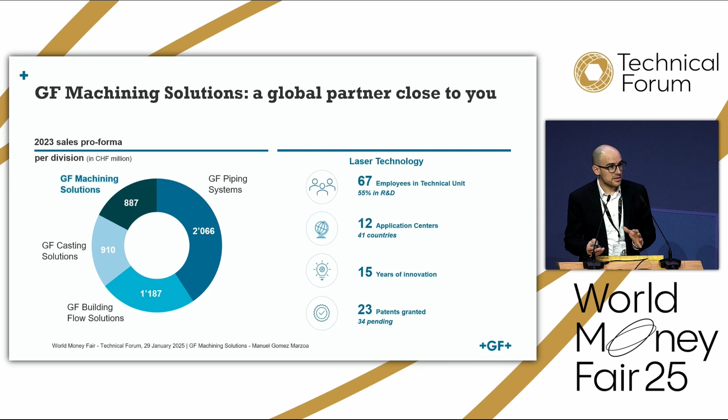So you've seen a little bit in the teaser, GF Machining Solutions. We are a Swiss machine manufacturer. We provide high-speed milling machines, EDM machines, and laser. As for the laser, we are in charge of engineering the machines, but also the CAM system. This gives us really the freedom to innovate at our pace, and as well strike a good balance in keeping things simple and user-friendly.

We are leading providers of 5-axis machining centers for laser in different industries, but essentially there are just two types of applications we do. First is laser texturing, where we apply normally aesthetic textures on any 3D part. It can be a part that is several meters long, or a small part for the watch industry, for instance. And what we are really seeing, thanks to the advent of femtosecond laser machining, is a lot of interest in laser micromachining, which you can assimilate to laser milling. We remove material, sometimes in applications requiring really high precision within microns. And of course, we also have, as the last picture shows, laser cutting and laser drilling applications.

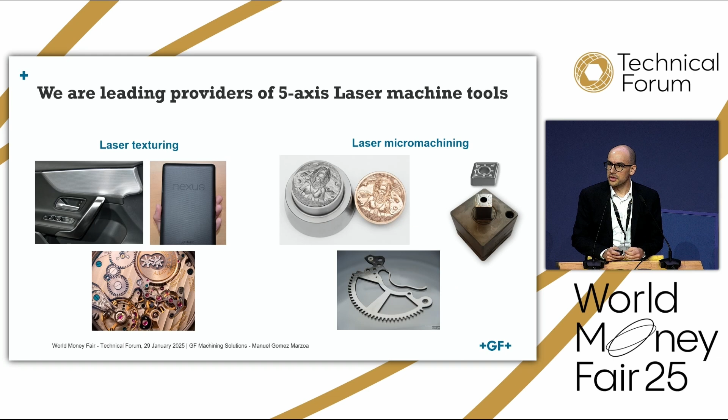Now, in the mint and medal industry, one just needs to come here to Berlin every January and see that just walking around the stands, we see crazier and crazier things. We see unconventional machining or manufacturing methods everywhere with 3D printed coins, composite coins, plastic injection. We see unique designs in 3D. I mean, it's just fantastic. This shows that innovation is really driving this world. And also for the laser, it's happening.

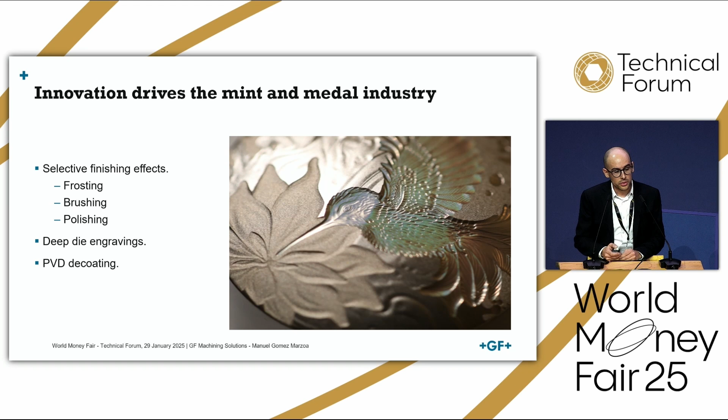Regarding laser, we've seen lately the following trends coming up. Customers are getting more interested in customizing, really fine-tuning the finishing effects, the traditional ones, but also new ones like brushing or polishing. Then we have also requests to do deeper designs, deep die engravings. The medals are getting bigger, they are having higher relief, so this is becoming commonplace. Now we are doing projects up to 10 millimeters in depth, with finishing applied to it. And, of course, requests for PVD decoating, which all shows how flexible the laser is as a tool for a mint and medal shop.

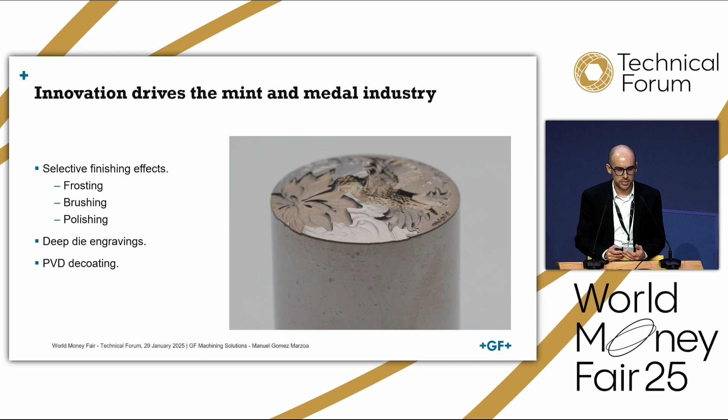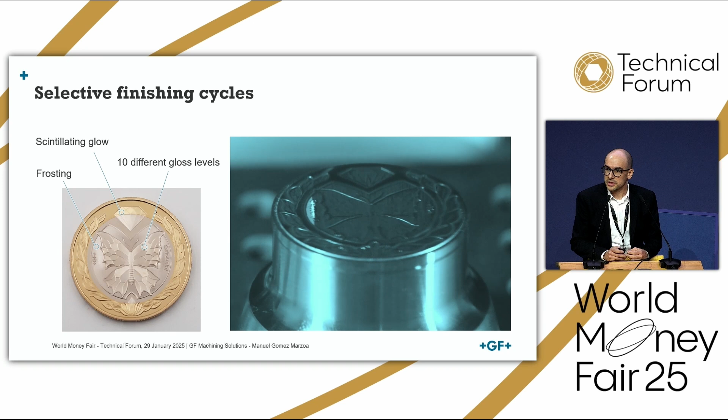So let's review a little bit each of these three points, starting with the finishing. This is an example we've done a while ago, where we have a lot of different finishing cycles. We have a frosting. We have 10 different gloss levels on the wings of the butterfly, and we have a scintillating glow on the diamond. All this is possible by mastering the laser parameters, and our systems allow us to do that easily.

Moving to high relief die laser engraving with laser, this is a nice example as well. It's 3 millimeters deep. It's the shape of this hummingbird. And we also perform some frosting and glossy finishes at the end. The most interesting part here is that we have done it on a dome that has a height of 3 millimeters.

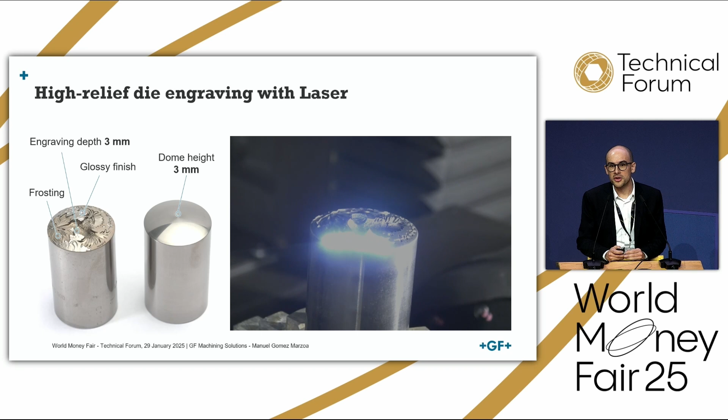We use a quite funky machining strategy that follows the shape of the dome progressively to make an engraving that looks really fantastic and is right to size everywhere on the circumference of the die. Here in the video you can see a finishing cycle where we are completely following the shape of the engraving.

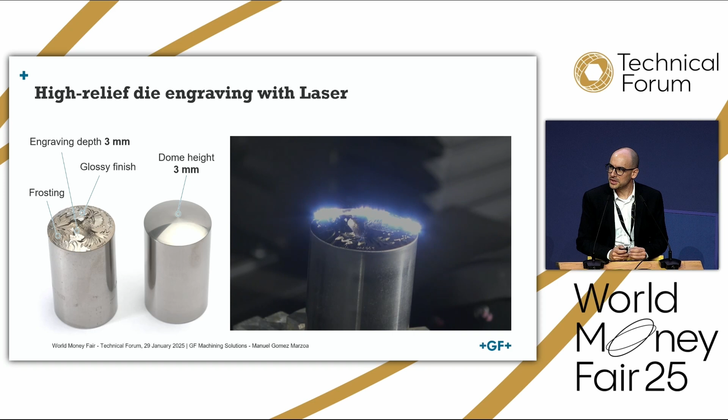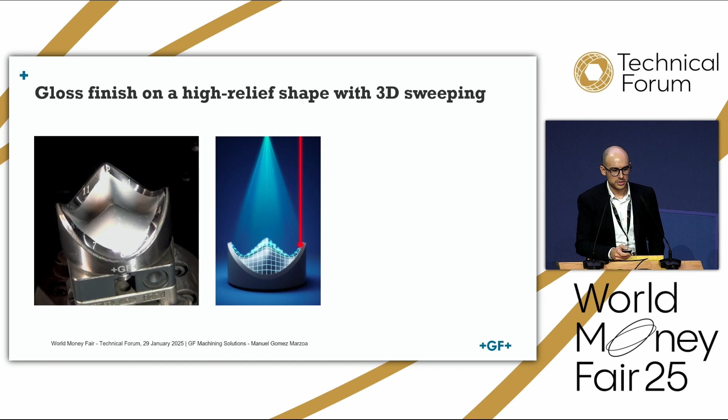Now this technique is great, but it has some limitations, as I will show later. Let's imagine that now we have to perform a finishing on this part. This is a very high relief part, and if we apply the same procedure, essentially what we are doing is sweeping the surface all over the height and then just moving the beam. Schematically, this is our beam, and the beam is doing like that - it goes up and down, following the surface and progressing over the part.

But there's an actual problem to that - when you get to high relief ratios like this, here's what is going to happen. If you compare the beam at the center and the beam at the side, when you project the beam on the surface, you would like to have a circular spot, very small. But actually at the side, what you get is a projection of the spot, which is an ellipse. And that's a problem.

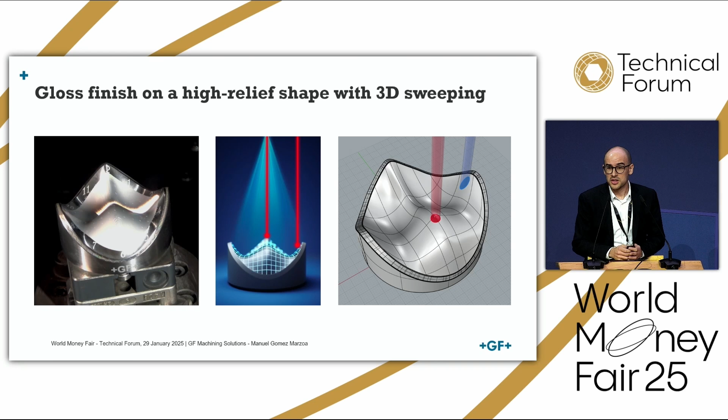In laser machining, we always want to be perpendicular to the surface we are machining. When you get an ellipse, you have the same energy, but over a bigger spot, so your energy density goes down. Besides that, if you have lower energy density, you have lower material removal rate. So you can expect different results on the blue spot and on the red spot. And last but not least, you will lose even more energy due to reflection - most of the energy will be reflected and will not be used to ablate the material.

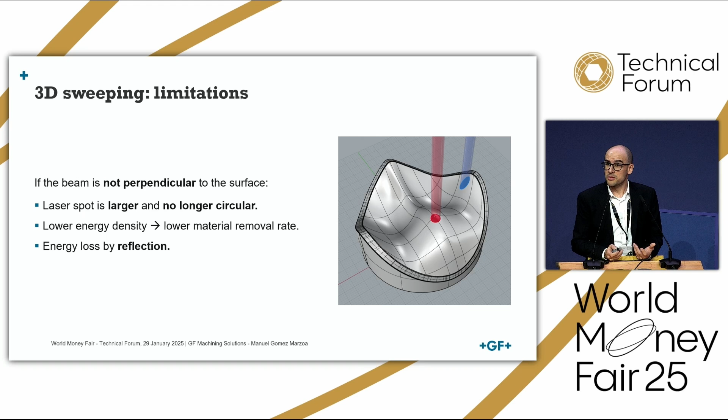So how do you solve this? Sometimes you can just live with it, but for instance, if you take this part, it's the same as before, but now we are doing a brushing. The brushing is extremely sensitive to this phenomena we just described. So a solution is to use a five-axis laser machining strategy.

How does it work? Our software takes the surface and will patch it, dividing it into tiles, if you want to call it that. The programming of the part is done so that for each tile, the machine will position the part and the beam so that the beam hits in the most perpendicular way to the patch. So one patch is one machine position, and this is programmed automatically - our software generates the patches. You can also manage the interface between the tiles so that you don't see anything.

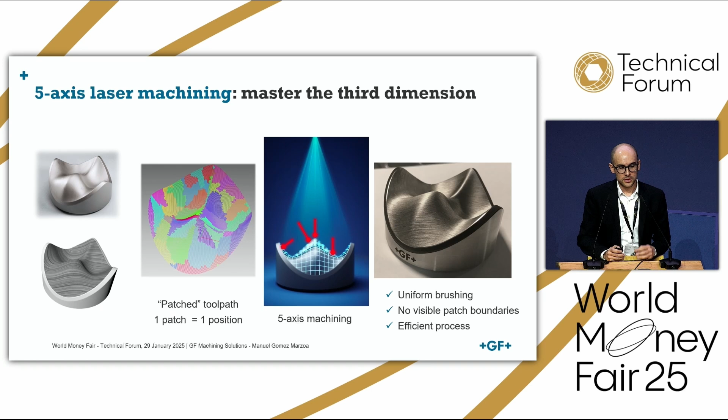What we are actually doing is this: if we go to our previous design, the laser does one patch, then we move to another one, moving the part with respect to the laser, then another, and another, little by little. Every slice you do, the patches are redistributed to keep it random and have a really nice uniform aspect at the end. So you see there's no visible patch boundaries, and it looks great.

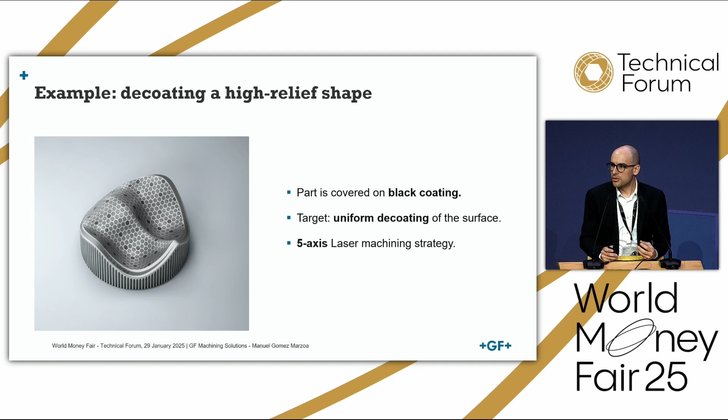And it's also very efficient, as I will show you with an example. If we take the same shape now, I took this example where we put this shape, coat it with a black coating, and try to uniformly decoat the part using five-axis machining strategies.

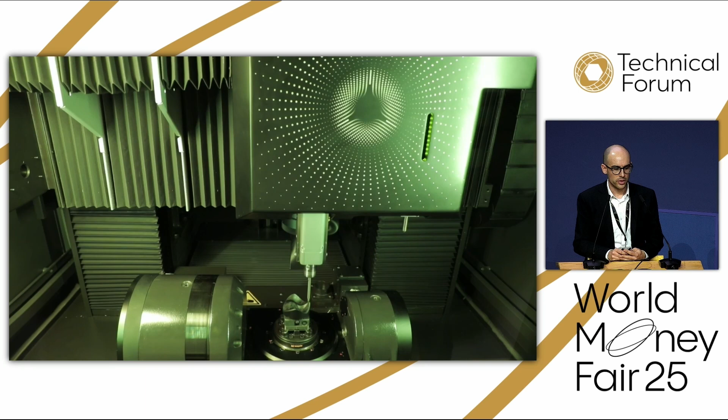So this is how it works. We program it on the machine. Now we are referencing the part, and we are ready to shoot.

So what is going on is that the part is set up in a way that the laser is every time, as I said, perpendicular to each patch, and we go little by little, removing all the coating on the part. This is real speed machining.

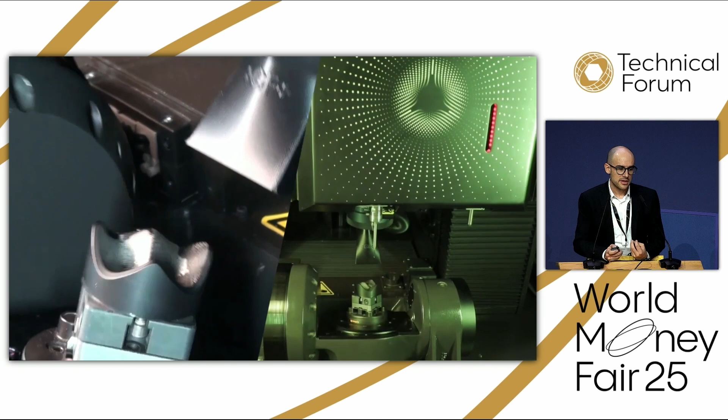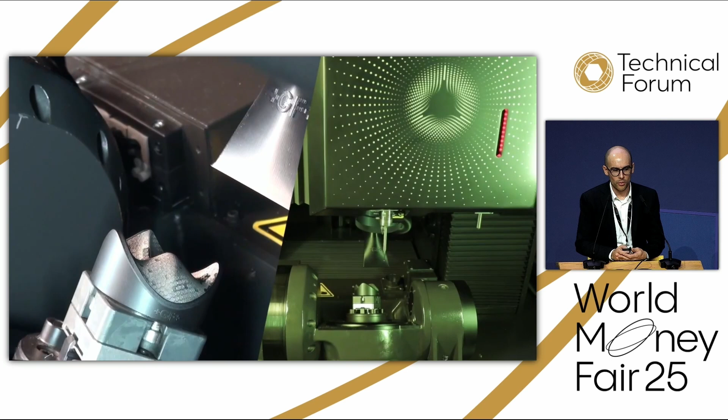And this is a really interesting technique. For instance, when you're removing a quite thin coating, like PVD coating or diamond-like coating, on a part that is not flat, in the places where you have high relief, you will not be able to remove the coating effectively, or if you want to do it, you will touch the metal on the flat parts. So that's the correct technique to remove a coating on a part that is really far from being flat.

So it's finishing and it's over. So that was real-time decoating.

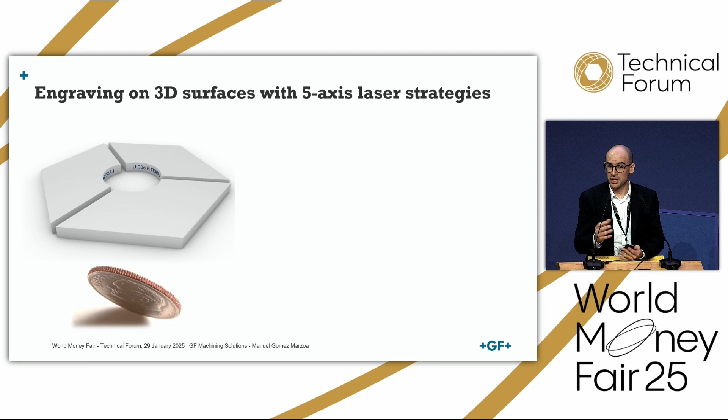We must not limit ourselves to decoating; we can go further. We can also do engraving on 3D. So if you take the edge collar molds for coins or medals, you can perform the lettering on relief. You can engrave the lettering, and you can also do it continuously.

For that, I present this example where we started from a cylinder and we created a notch all around and also a thread with an amazing quality.

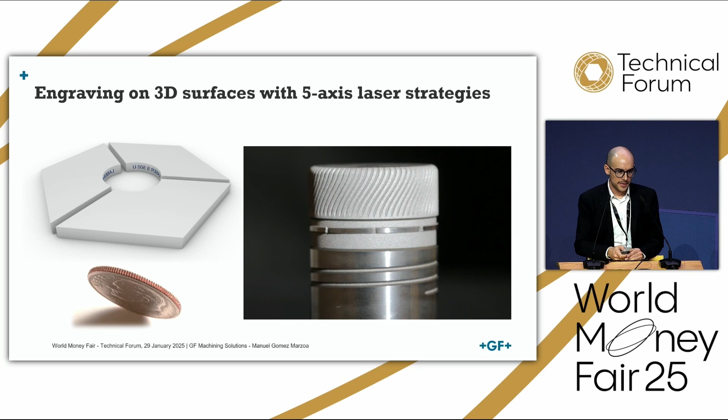So I showed you more or less what is the interest of 5-axis laser machining.

Last year, we presented a new machine. It's called the Laser S500U. It's our most precise machine, dedicated to micro-machining in electronic components, stamping components, etc.

And of course, this is a big moment for us, and we wanted to celebrate in the same way that is celebrated by you sometimes, which is creating a commemorative medal, let's say. But because our machine is quite special, we created a very special medal. It's called the iconic part.

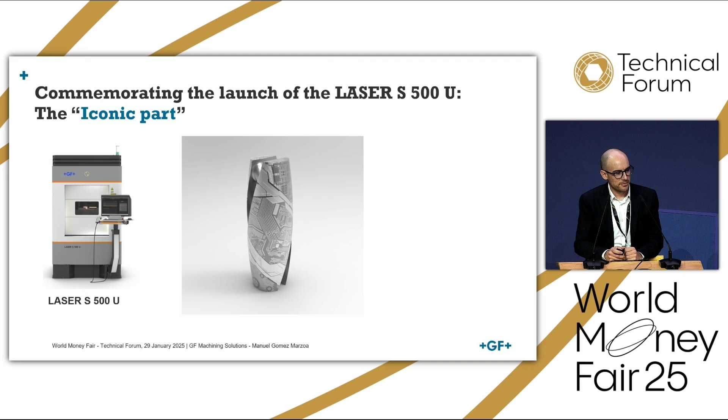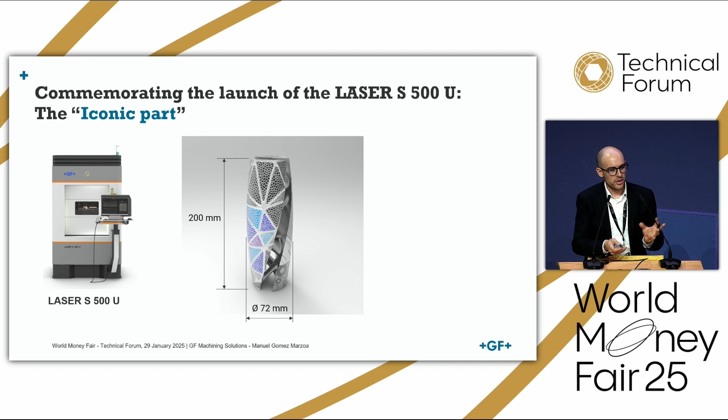And it looks like this. It's unconventional, of course. We have a cylinder, kind of a parabolic shape, extruded in 3D, that is huge - it's 200 millimeters high, 72 millimeters in diameter. And we created two textures, one that is kind of a natural texture with colors, and another one that is more technical, which reflects our both backgrounds, micro-machining and artistic texturing. And the part looks like this, compared to a PET bottle.

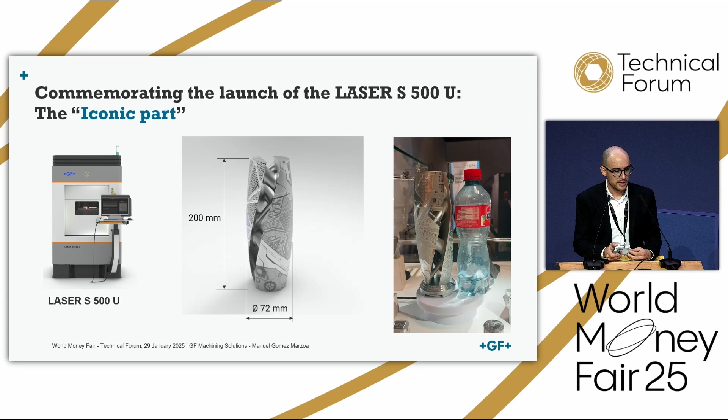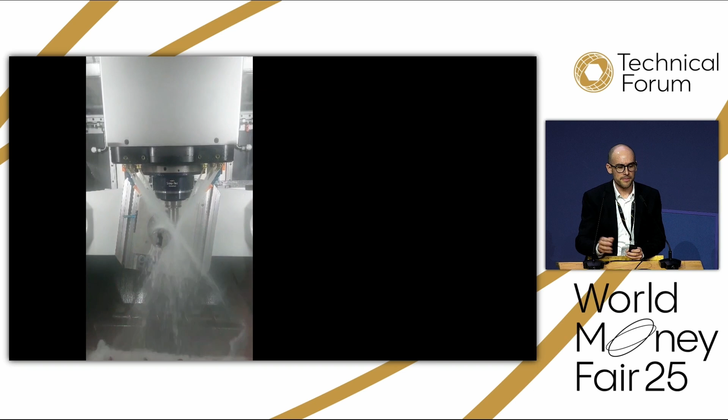Just let me share a quick video on how we did this part. We started from additive manufacturing. We cut the parts, and then we moved it into the milling machine to create a right polished surface that we need for the laser. So here is the final result.

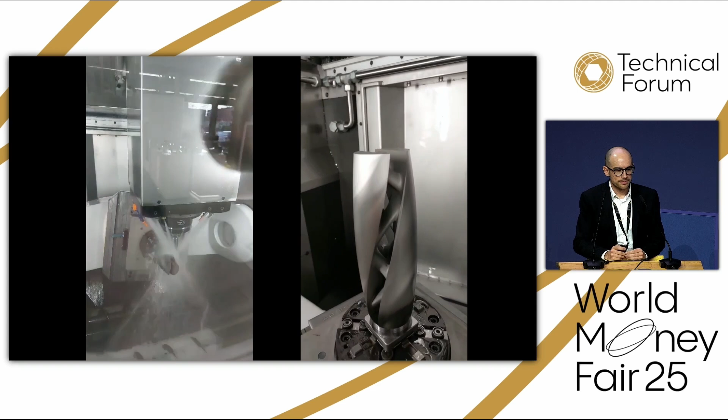And then, obviously, it's time for the laser. But before, we need to program. So the first step for the lasering is to go back to our desk, take our part, and start creating the textures and the engravings.

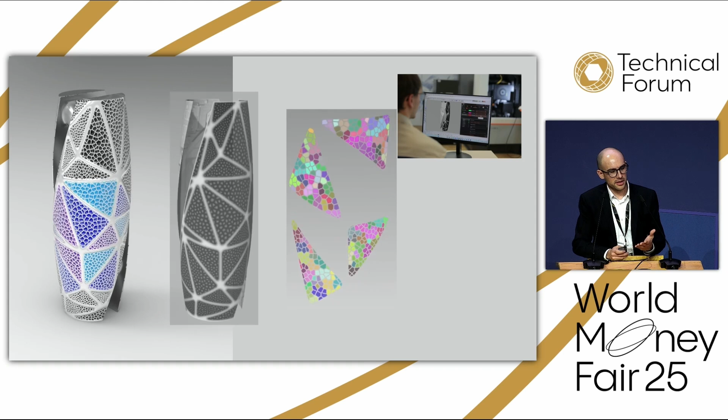So here is the toolpath that is created for the bionic or natural part, let's say, and the technical side comes afterwards. Here it comes, and as you see, every color is a patch. So every color represents a position in the machine. And this is programmed, as I said, automatically. Of course, you have some wiggle room, but you don't need to know.

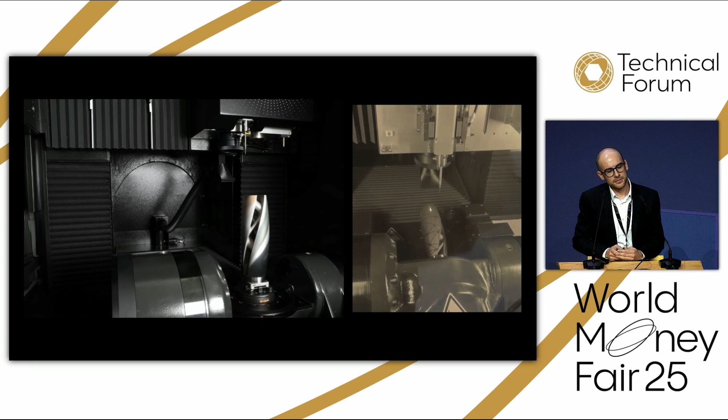Then it's time to put the part on the machine, click start, and then cross your fingers. Nah, I'm just kidding, you will have a good result at the end. This is the result we got. The part looks fantastic - you can come see it at our booth.

Everything, all the textures that you see, are done in a single setup with a single machine, in a single programming step. And for me, what I love the most is the micro-machining part, which is fantastic. You see no patches, even in large areas. So it's really a feat, what we accomplished here.

To conclude my contribution today, I just wanted to leave you with some remarks. We are laser machine providers. We also develop our own CAM, and we are at the forefront of developing new strategies. And as well, with our unique 5-axis laser strategies, you will be able to unlock this third dimension and perform any operation that you do today on the flat, on any 3D surface.

So that it's a gateway, of course, for innovation. I thank you a lot for your attention. Thanks.